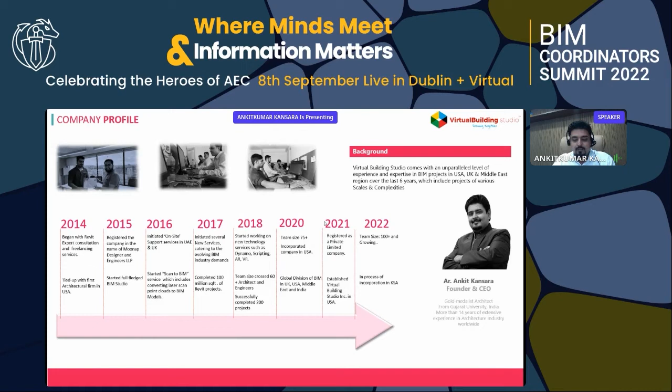Here you can see our journey. We started Virtual Building Studio in 2015 after returning from the UK. It was set up with the objective of providing comprehensive end-to-end customized services and solutions to the AEC industry globally. Our vision is to become the most innovative AEC service provider globally, powered by digital technology.

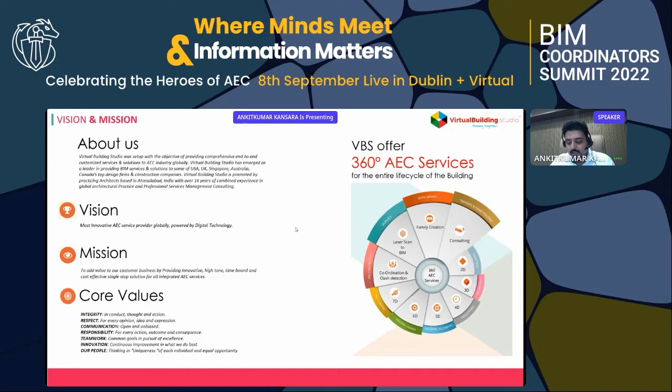VBS provides 360-degree AEC services, starting from 2D to 7D, scan to BIM, family creation, and consulting services to the AEC industry. I've got four things today for this presentation: what is BIM, benefits of BIM, integrated digital delivery, and common challenges.

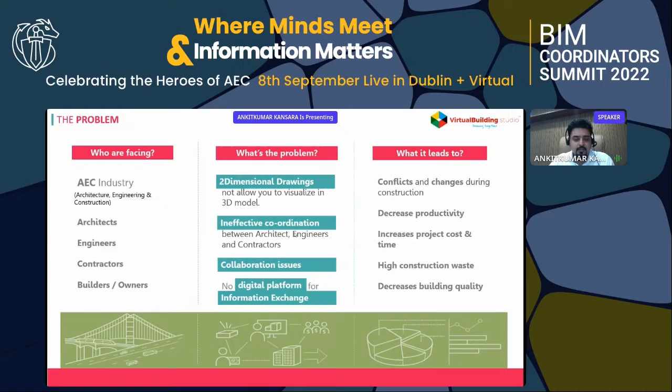So why do we need BIM? As we all know, AEC industry stakeholders - architects, engineers, contractors, builders - face problems like ineffective coordination, collaboration issues, and no digital platform for information exchange. This leads to decreased productivity, increased project cost, high construction waste, and decreased building quality.

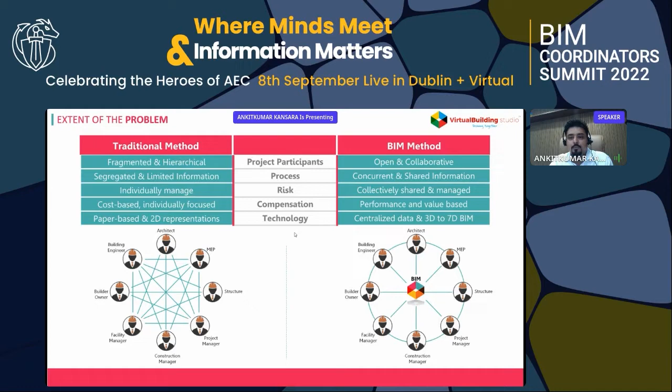The solution: there are two clear methods - traditional and BIM. In the traditional method, project participants are fragmented and hierarchical, whereas in the BIM method they are open and collaborative. The technology in traditional method is paper-based, while BIM-based technology is centralized, allowing you to collaborate, share and manage collectively. That's why BIM was introduced - it stands for Building Information Modeling.

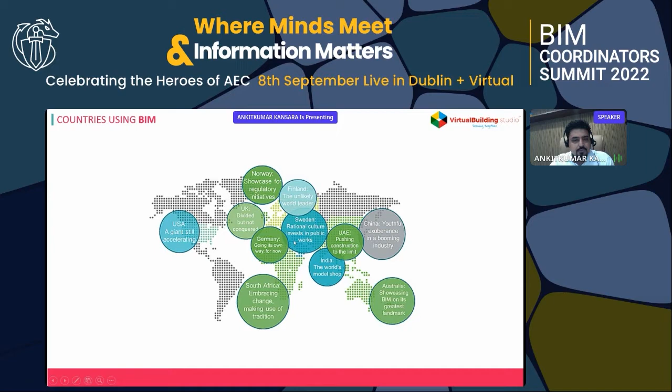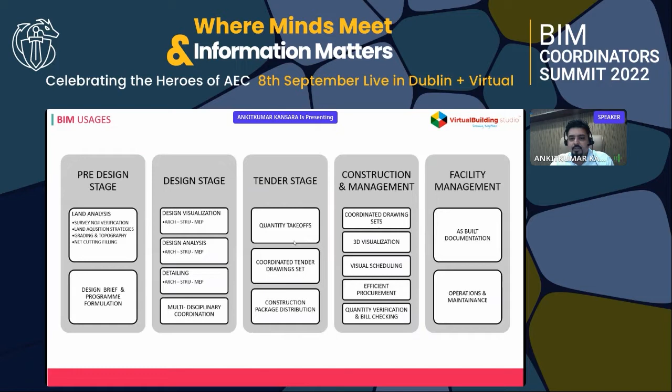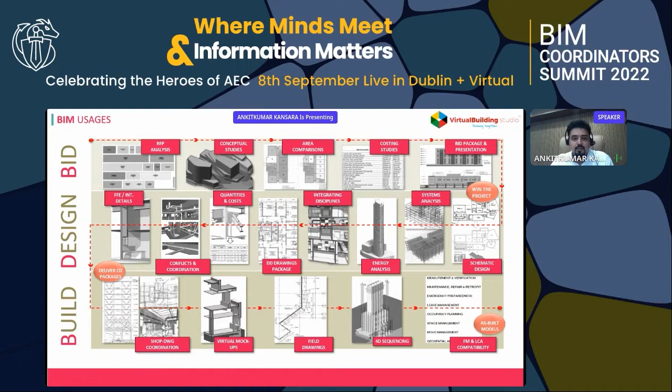How and where to apply BIM? You can apply BIM from pre-design stage to design stage, tender stage, construction and management, and facility management stage. So BIM is useful in the entire project life cycle: design, build and operate. Starting from bid to design to build, BIM can be used at any stage and you can take benefits out of it.

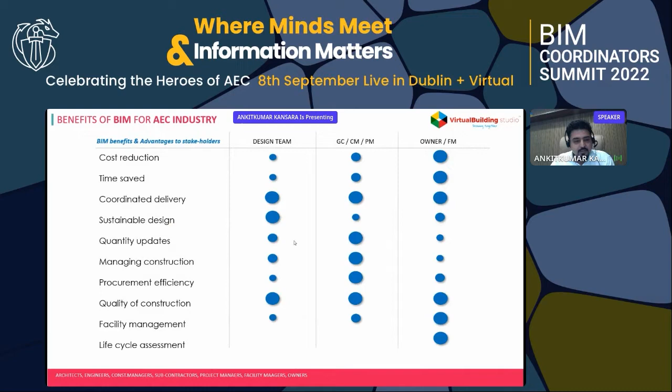So what is the real solution? I know we all have failures implementing BIM. Though we have used BIM, we didn't get successful projects, right? I've heard from many stakeholders when I meet people - they say they implemented BIM but didn't get the benefits that people generally talked about. Why does this happen?

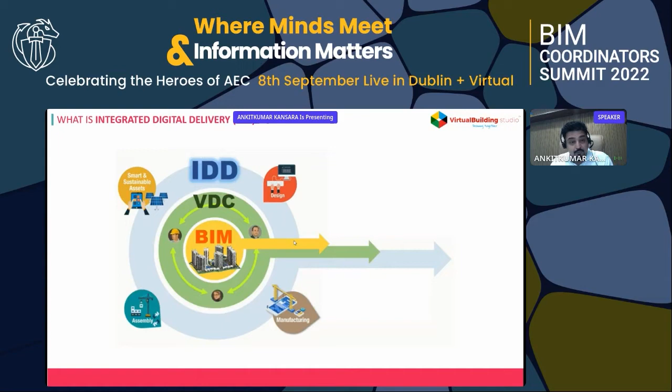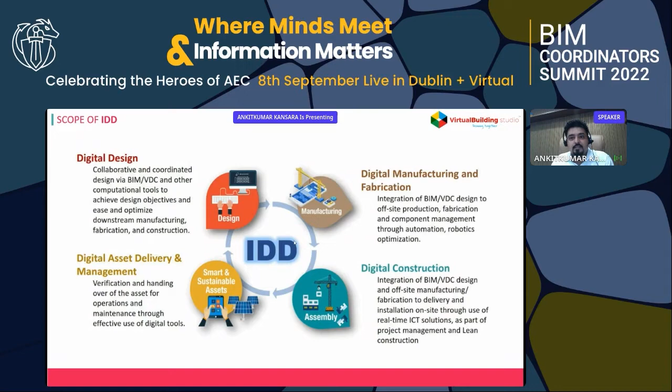The real solution is IDD, which is Integrated Digital Delivery. The real solution goes from BIM to VDC to IDD - you can see the development from BIM to VDC to IDD clearly. The scope of IDD, or integrated digital delivery, has four main areas: digital design, digital manufacturing, digital construction, and digital asset.

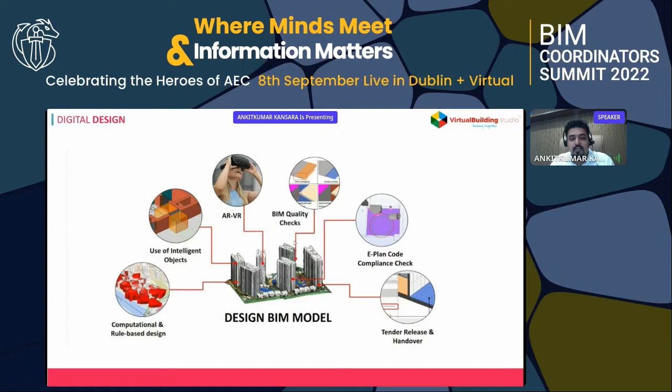Let's start with digital design. People working in design don't necessarily have experience of doing manufacturing, precasting, or prefabrication, and that's why it's important to use digital design. You've seen AR, VR, and many other technologies used in designing - people from the consultant background have seen these 3D environments everywhere.

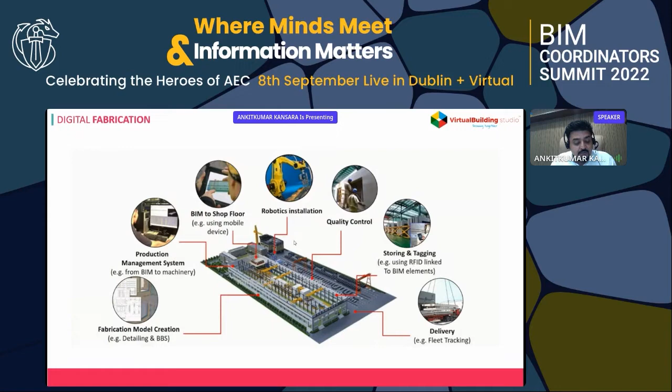Digital fabrication is crucial. It's a much better environment for workers to work in - enclosed, air-conditioned - so they are not exposed to external weather conditions. To do more fabrication, we have to do more manufacturing.

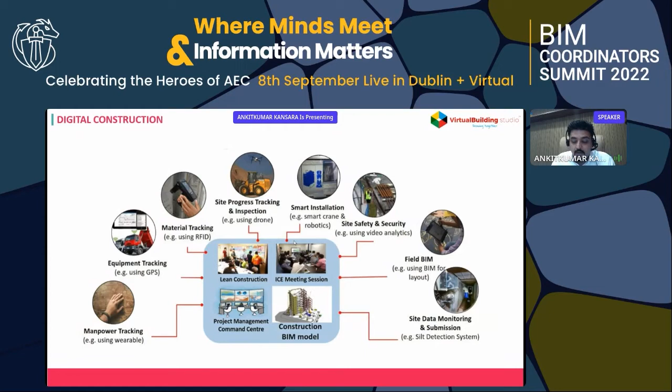Digital construction - we have to look at everything from RFID through drones, through augmented reality and virtual reality for digital construction, as you can see in the diagram. Digital asset management is about asset delivery and management.

Unfortunately, people who design the building never experience constructing the building, or fabrication and assemblies. So the designer who designed the building actually manufactures problems into the building, and the facility manager who runs it doesn't tell us what we have to fix going forward. So we need better engagement between the designer, the facility management, and owners - that's very essential and crucial.

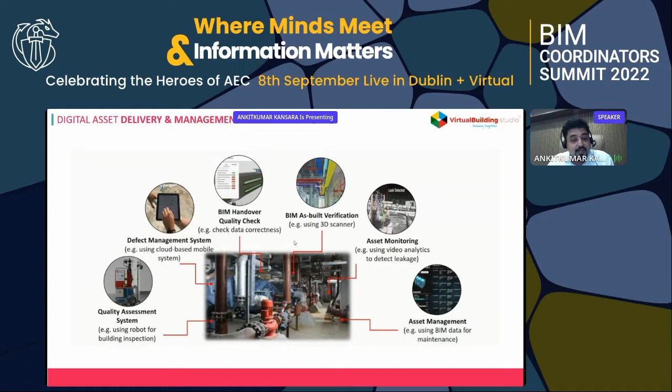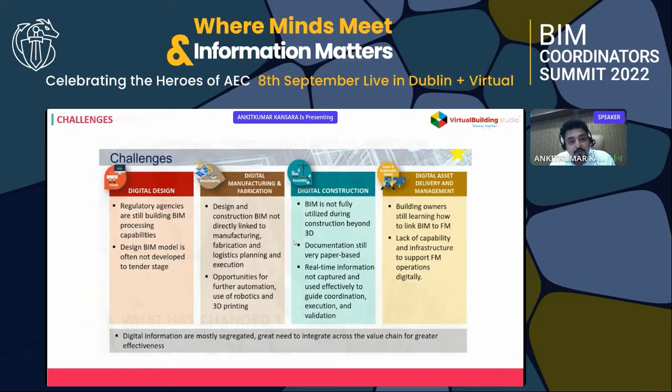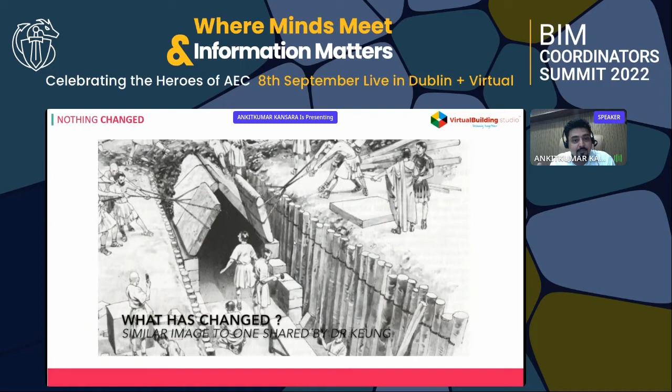There's a great need to integrate across the value chain for greater effectiveness. As you know, a picture speaks a thousand words. Look at this picture of the Greek and Roman Empire - guys laying bricks, and one thing you'll notice is the architect and owner sitting there giving instructions to the people directly. That close integration is not happening in modern construction. We need much closer integration, and that's why I like what happened in projects like Malaysia, because nowadays managers, owners and architects don't sit on site managing people. That's why we need a more integrated construction approach.

So here I would like to show you a small case study of the metro project we worked on. We were a small part of that project.

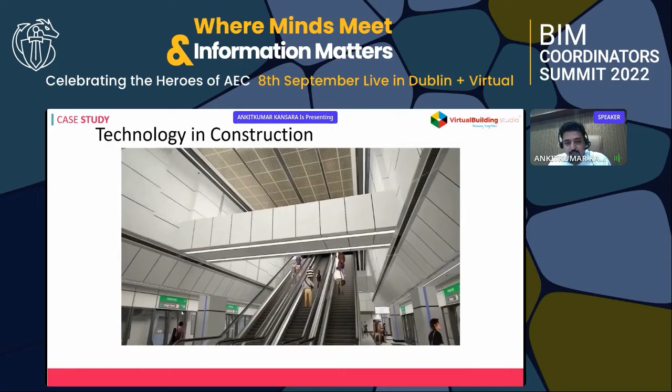Very quickly, let's look. If you've been in the construction industry for the last 10 years, you must have seen this kind of rendering videos and walkthroughs used to show contractors and owners.

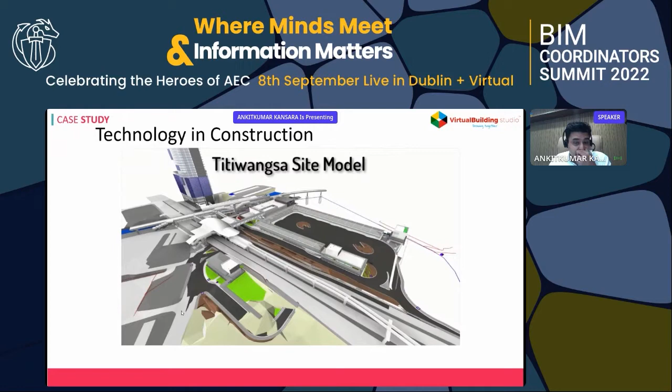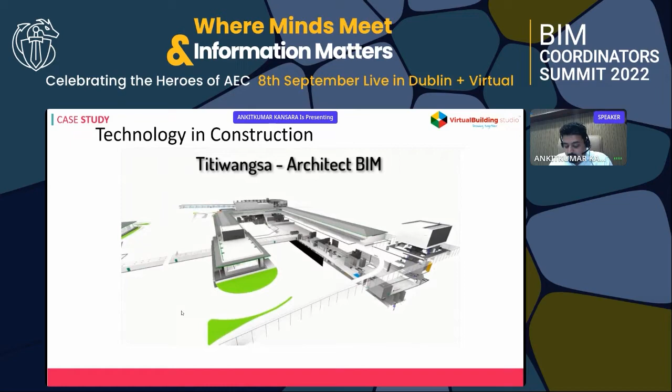Now you see this detailed architectural model here, with a great level of detail built into the architectural elements. This is a situation where we're building different models for the architecture.

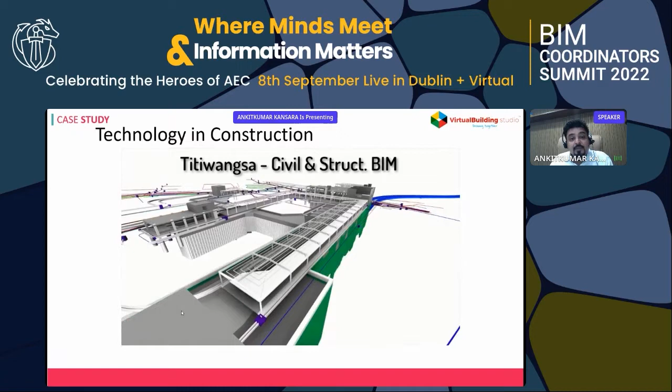This is a structural model where you can see the steel structure, concrete structure, diaphragm walls, and all the details. In a similar way, we have done the MEP models as well.

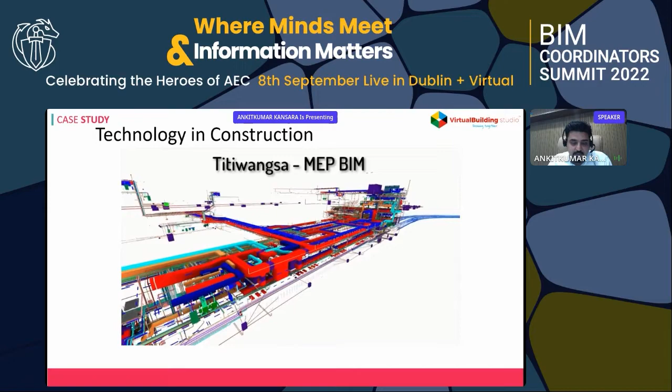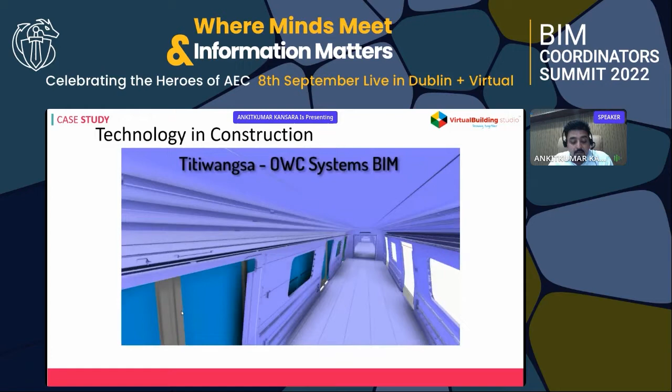All the services are designed in a 3D environment here. You can easily see them, and they can be integrated and coordinated simultaneously. All the services are integrated too - air conditioning, drainage, fire safety, and many other services.

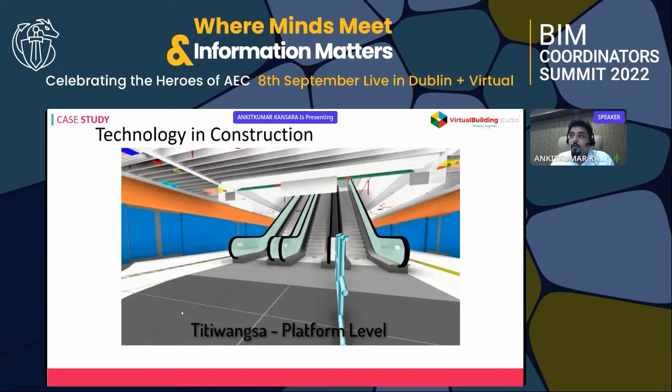Then we take all these complicated models and incorporate them with each other, so we can check coordination and collaboration, and also do constructability reviews.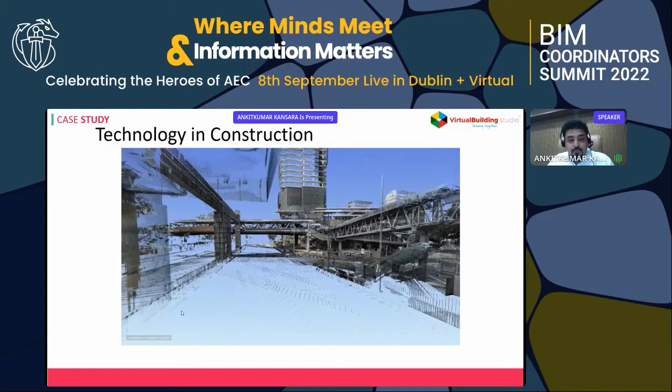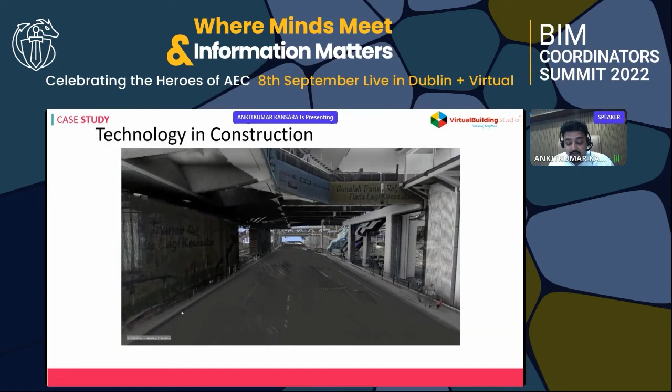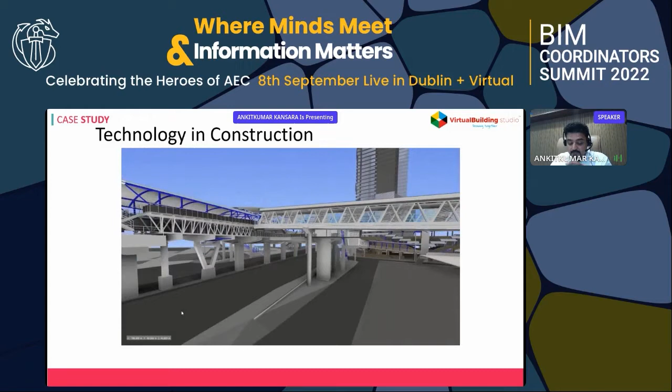We use a slightly more advanced technology, laser scanning, here. We scan the existing station with an accuracy of 5mm and create a reference as-built drawing, so the design model for the future is completely coordinated with the existing condition. This way we can tie together the virtual environment and the existing environment - that's how we created the as-built model and integrated our future model with the existing model.

Now, drones - how many of you have used drones? I'm sure many of you have crashed into trees like me. Drones have been used extensively in this project.

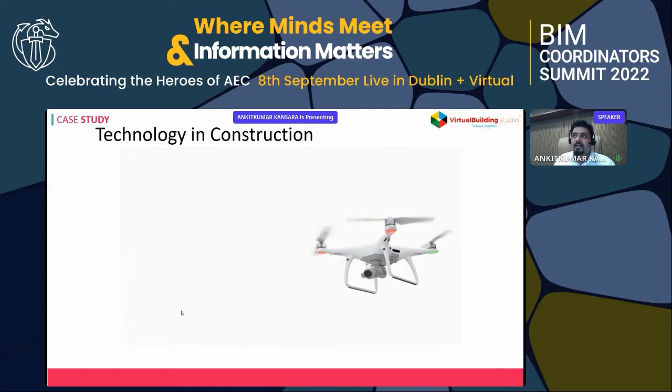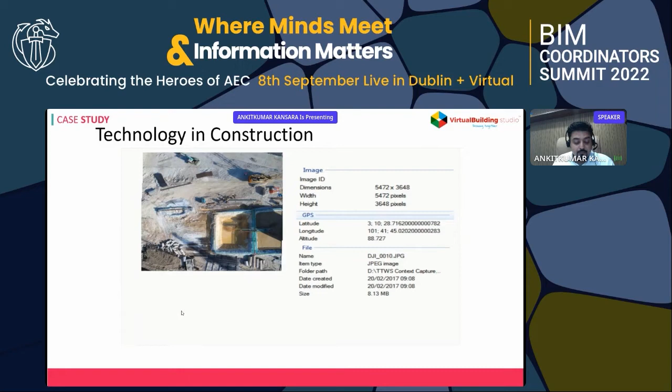Unlike a traditional survey, we use drones to capture high resolution pictures, and from those pictures we can see the entire progress of the site. This is a sequence of pictures taken by a drone 100 meters off the ground, and if anyone here is into photography, you'll see these are very high resolution photographs.

See this little yellow box - that's me and my colleague, sitting on site and flying the drone.

We take the high resolution pictures and process them in a computer to make a 3D model. This is called a 3D photogrammetric model.

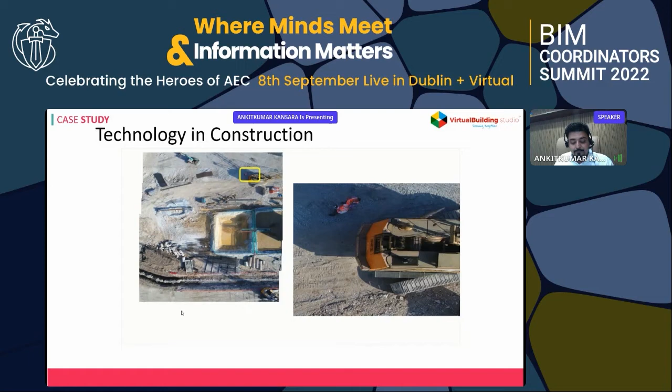You can take the photographs in 2 hours and process them in the next 2 hours, instead of a traditional survey which takes about a week - it's much faster than that. Within a day we can do 2 hours of photographs, 2 hours of survey, and 2 hours of processing, and the whole site is ready.

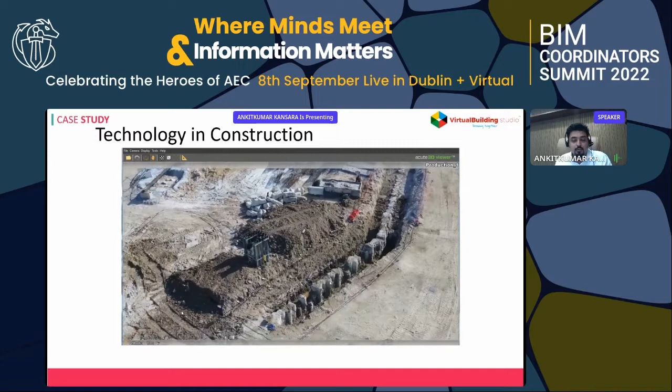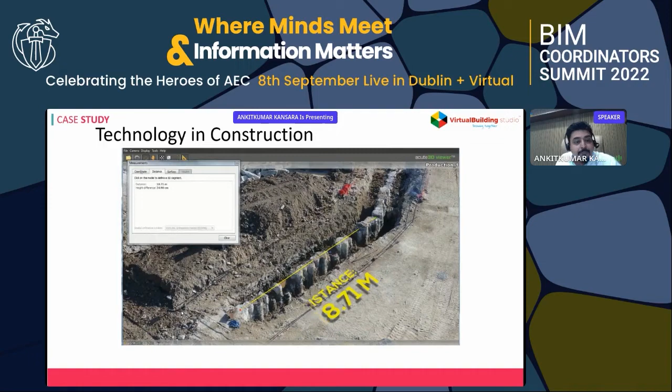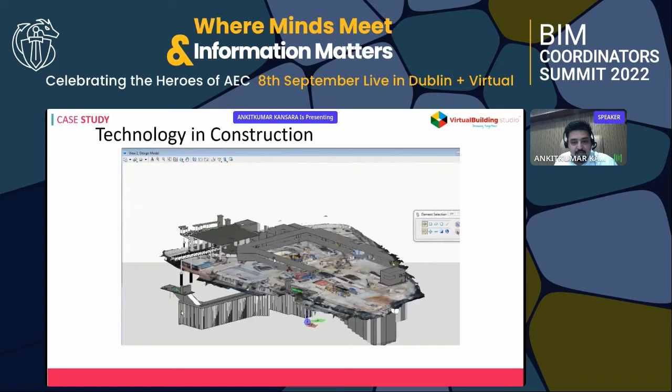You can overlap your virtual model with the 3D model and check the actual progress of the site - you can even measure the distance of the piles. That's the benefit of using this integrated digital delivery approach. You can have multiple layers, turn them on and off, overlap with the site, and check progress. It's a critical tool to monitor existing progress as well as see future challenges.

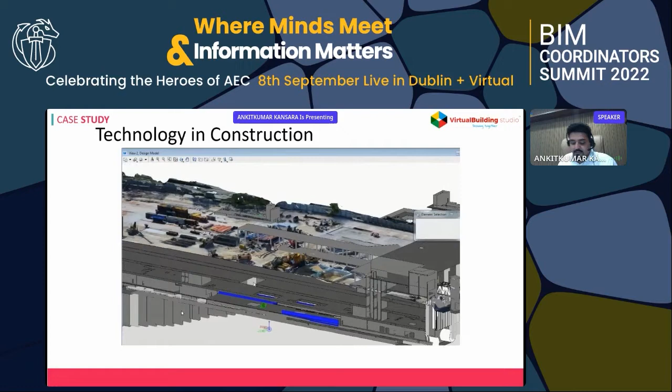Here's another station with traditional photography - just to show that we applied the same methodology at every station.

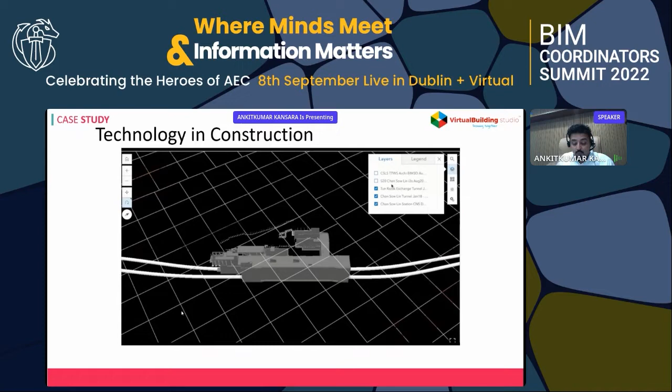GIS - what I want to show here is a Geographical Information System. We put this model online using a web browser, where you can see the design model and the photogrammetric 3D model overlapping each other.

It's secure - don't think it's not secure, it is secure. All participants can look at the current site situation and future construction, and have their own views. Participants can comment, see responses, and check progress. It's very critical for the design and construction team.

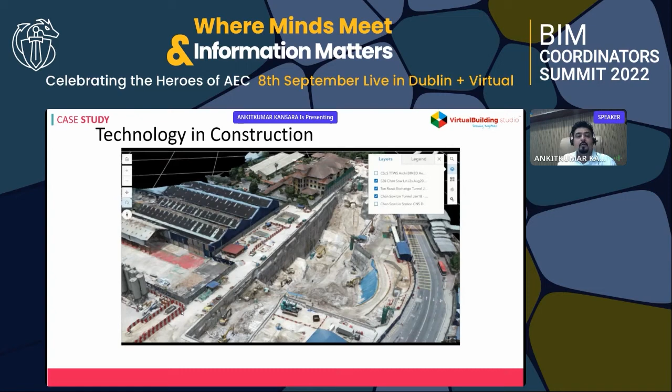I hope you understand how the two models work - you have multiple layers which you can turn on and off, and every stakeholder, whether designer, project manager, planning manager, or procurement person, can see, check, and understand where the actual progress is and what they want to check.

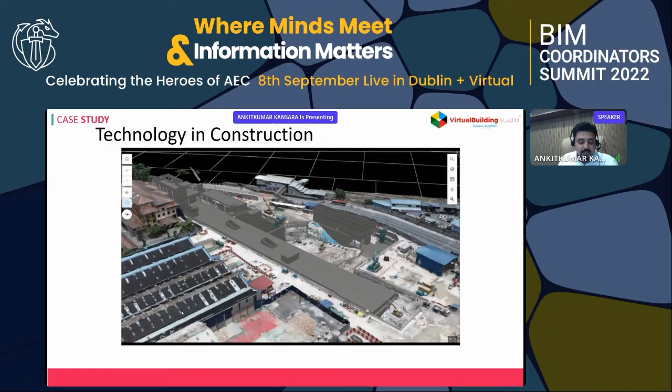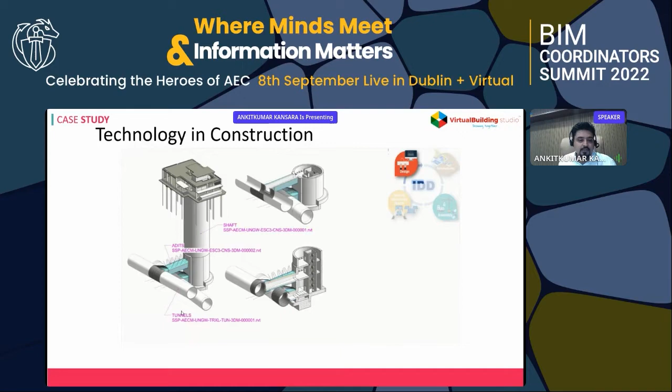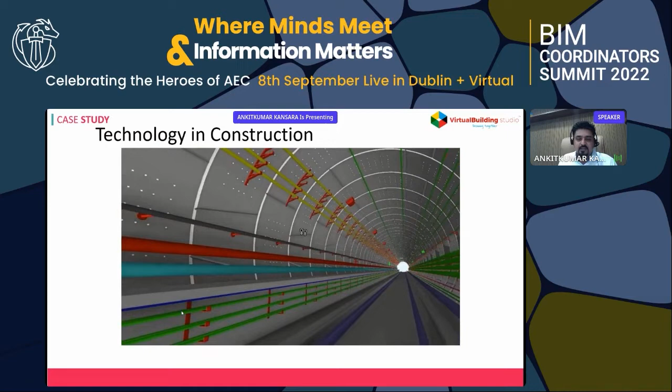It's not only about building design - we design the full infrastructure, underground services, tunnels, and multiple other things. As you can see in this image, the tunnels have been built with a great level of detail, including side walkways, hangers, and multiple other elements. It looks pretty easy here, but everything is designed by different specialist contractors, and we have to collate everything into one and do the coordination.

That's why it's a tough one.

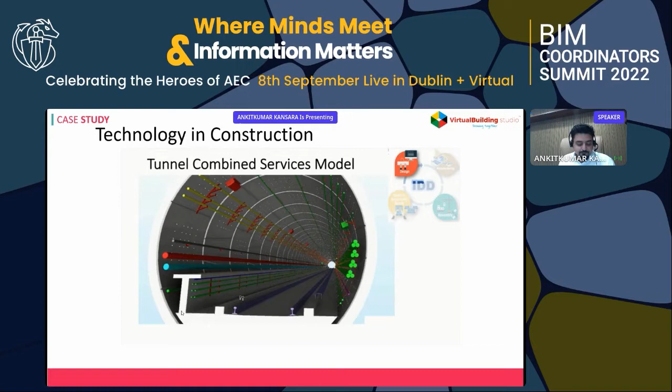I have to say proudly here that we also use quantity surveys. So 5D quantity takeoff has been done using the same technology. Construction planning and quantity takeoffs, we run the entire schedules into it.

The kind of software we use runs entire schedules. We check the existing buildability. We check their quantities and build everything based on that. We also check for future projections for the quantity and the cost.

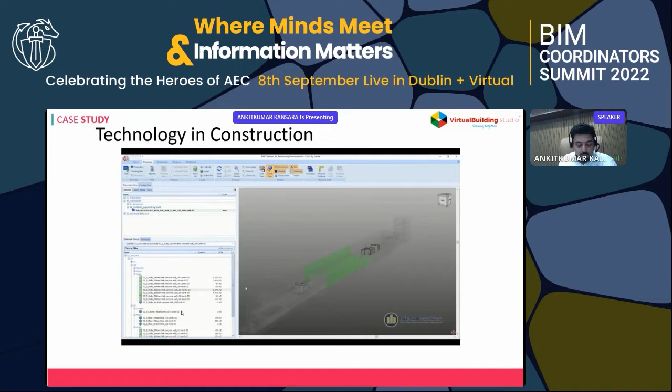So everything is measured from the online approach. Everybody has the right, and they can see the level of details based on their rights. So we use the 5D model, a progress on site, and it helps us a lot to forecast. It's a very powerful monitoring tool.

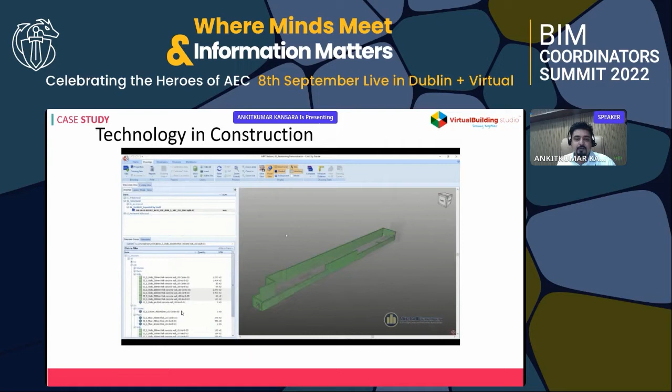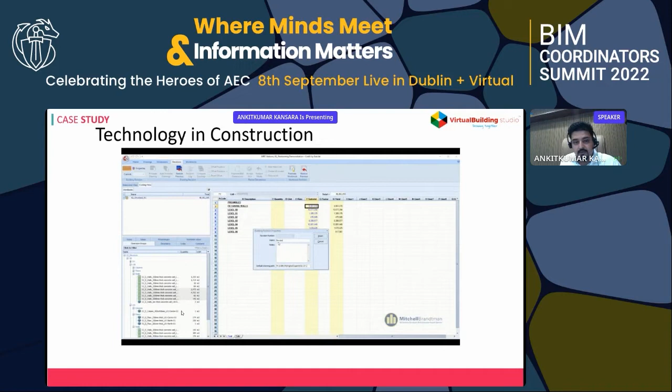Can you see, if I click, you can see the data of walls, diaphragm walls, their quantities. So if I have multiple contractors, I can group based on that, and I can take out my quantities and everything accordingly, right? So I have different options available to play with.

And finally, the common data environment. So all of it's possible with the robust common data environment and the IT infra, so all stakeholders can work seamlessly. In this particular project, the stakeholders are from all across the world.

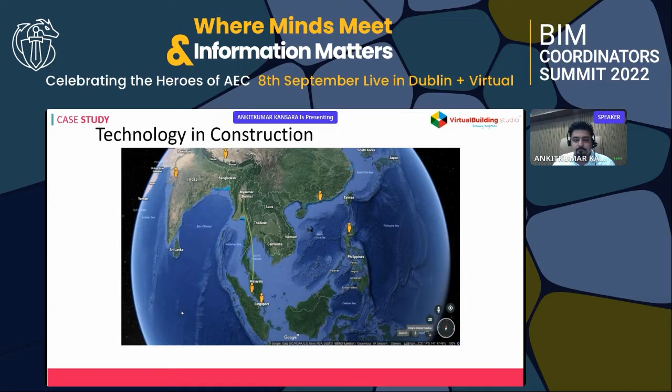So now you see where the issue is, right? I've been using BIM since 2009, but yet to see a successful project. I have seen a project come close, but I've never seen a project that got the 5-star rating.

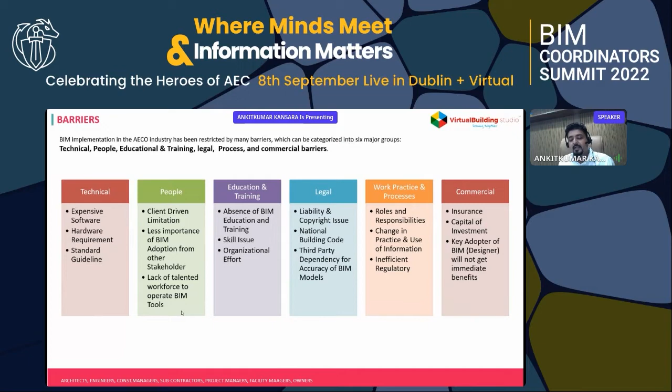So collaboration, let's look at the barriers to BIM. As you can see here, I've given six different barriers: technical, people, education and training, legal, work practices and process, and commercial. These are the six biggest barriers of BIM implementation in the AEC industry, which we need to solve in order to make IDD possible.

And how you can make it possible, from my entire experience, I can say that ironically, BIM is not going to give you collaboration. I mean, people generally say that BIM is going to give you collaboration, and I would say that BIM will not give you collaboration until you have a firm contract in place.

So client should drive the collaboration. As I said, client is the main stakeholder who should drive the entire collaboration process. And if you have a client that will drive the process, then it gets success. If clients step back and think that the contract is going to drive collaboration, good luck, see you at the other end. Okay, so it has to be led by the client for sure.

And I firmly believe that early contractor involvement is equally necessary, because the contractor is the one who is going to build the building, not the designer. Designers do beautiful designs, right? But the contractor knows how to execute it.

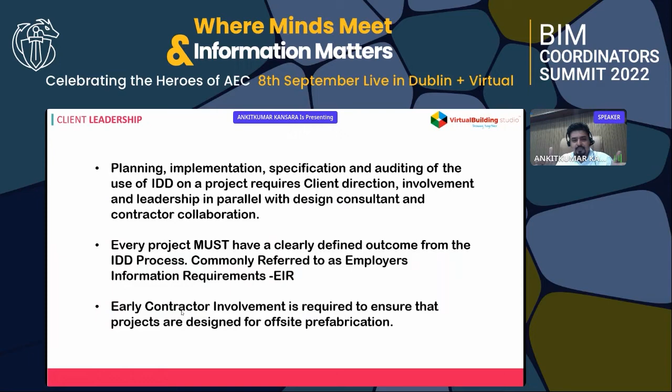And EIR, the employer's information requirement document, should be clearly based on objectives. What you want to achieve should be there at the start of the project.

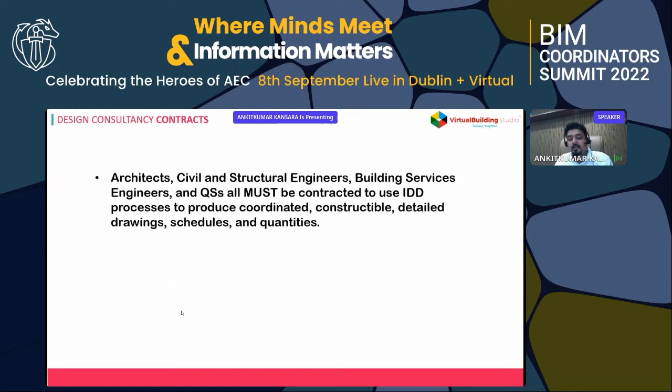Design consultancy contracts, as written here, the IDD process to produce coordinated constructible detailed drawing schedules, quantities, and taking through all the stages of the building. It's necessary that the contracts are in place.

Key challenges, to wrap up, we have a serious problem in our industry. We don't develop enough people. So the biggest problem is we do not have developed as well as experienced people on these technologies. So I call it people, process, and technology.

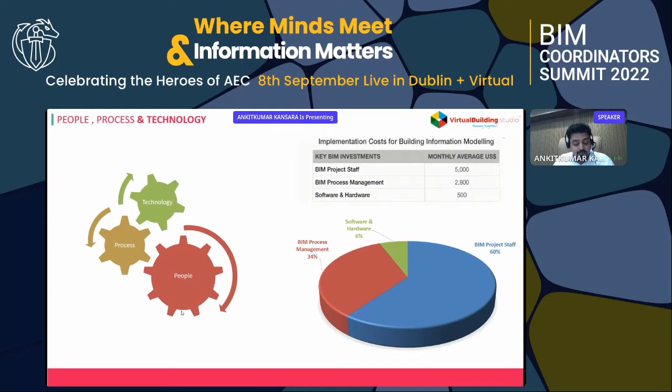So here are my closing thoughts for your consideration. I'm going to leave you with three thoughts, to do things faster, better, and smarter. So first is contract. Behavioral mindset is the most important part to leverage and to work with.

The second one is training. As I said, training and live workshops. This is the necessary tool for knowledge transfer and knowledge sharing.

And the third one is, to unlock the potential of IPD, we need investors, designers, suppliers, all to work collaboratively on one project, with a locking contract of multiple years, so they have the same experience, they can implement it on other projects, and everybody can learn from their experiences.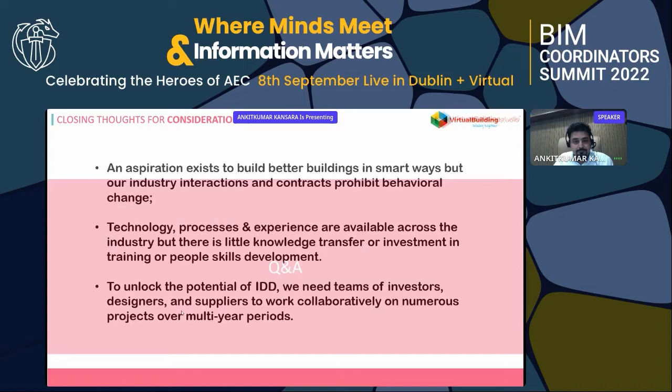So I will leave you with my favorite catchphrase. Regardless of what we all discuss, regardless of what contracts we have, regardless of what technology we use, it will get built, right? The only question is how many lawyers it will take to finish the agreements. That's it for guys, thank you all very much. I look forward to your question and answer. Thank you.